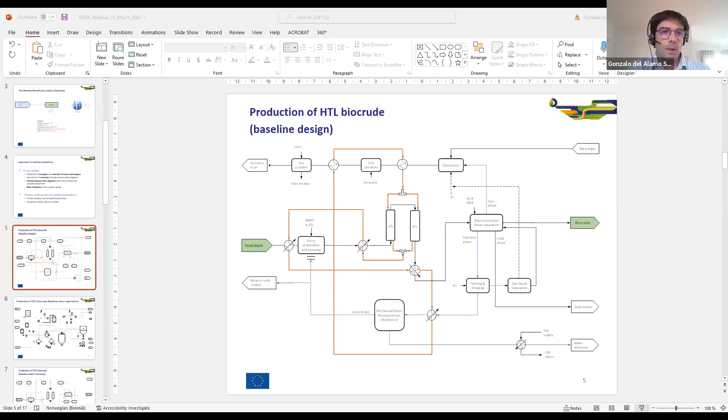Okay, thank you, Emma. So I will share my screen with my presentation. Share. Yeah. Okay, Emma, can you raise your hand? Perfect. You can see everything. Great. Yeah, good. Go for it.

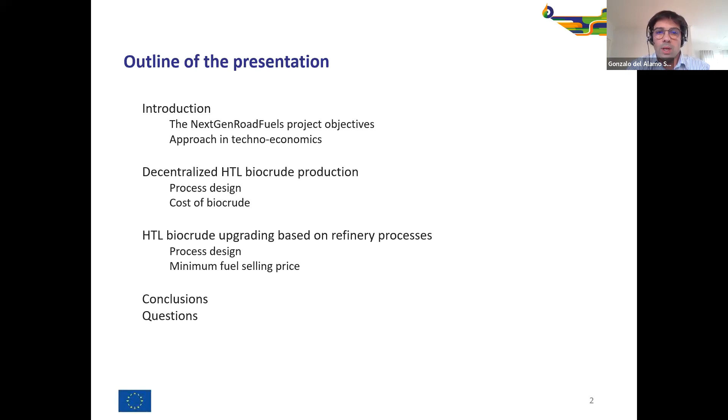Here I will use much time to look at the process design, and also I will present the main results for the cost of the biocrude. And then there will be another main section where we will look at the upgrading of the HTL biocrude based on refinery processes. Again, we will look at the process design, and also I will give the final results of the minimum fuel selling prices we have obtained. Then there will be some brief conclusions, and then I will give you the opportunity to ask some questions.

A few words about the NextGenRoadFuels project objectives. So basically, the project aims to produce marketable road fuels, in this case gasoline and diesel, from what we call aggregated urban waste. And aggregated urban waste are different main fractions of waste that one can find in cities. In this case, the three main fractions we have considered are sewage sludge, bio-waste, or the organic fraction of municipal solid waste, and then waste wood.

And then looking at the overall process or the overall value chains, there are two main aspects in the overall conversion. First, we consider the conversion of the feedstock to what we call a biocrude, which is an oil phase intermediate product. And this is done in a decentralized plant where the main technology is hydrothermal liquefaction at supercritical water conditions. Part of the HTL plant includes the separation of both nitrogen and phosphorus from the feedstock. And then the biocrude produced from the decentralized HTL plant is upgraded to final marketable biofuels at a centralized refinery, based on conventional refinery processes.

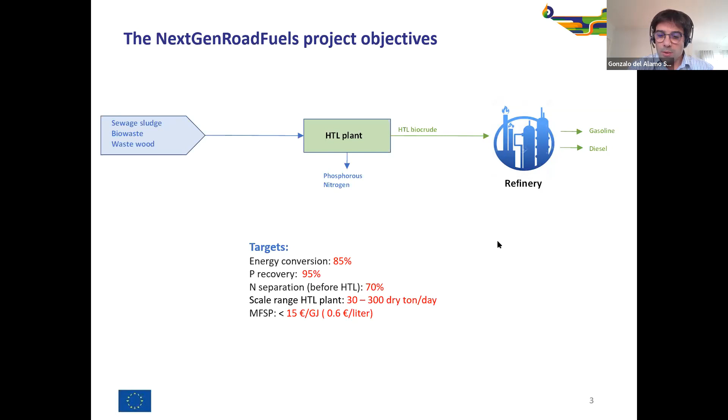Okay, approach in techno-economics. So this is the approach we have been using in this project. And also this is the typical approach that we at SINTEF Energy Research follow to do techno-economic analysis. Here, what is important in techno-economic analysis is to actually achieve some realistic results for the final cost of the biofuels produced from the overall technological route that we propose.

And then this includes some important aspects to consider. The first one is on the process design. So it's really important to develop a quite realistic and detailed process design that also includes technologies in the integrated process that are feasible. So then it's important to really spend time defining the overall strategies for the process design and also do a good selection of the technologies that will be involved in the overall process.

Then once we have these strategies and main technologies defined, we can describe different scenarios through what we call process block diagrams that show the integration of the main different processes involved in the overall conversion. And then once we have that, we look much more into the details of the process design, and we identify individual main process equipment, but also auxiliary equipment, and we develop what we call detailed process flow diagrams, which are engineering flow sheets.

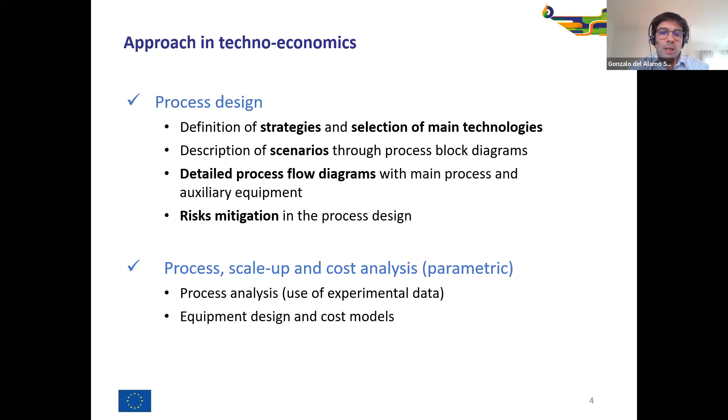Then on the analysis itself, the approach that we follow at SINTEF is to combine the process, the equipment scale-up, and the cost analysis through combined parametric models. And this is the approach we have been using in this project.

Okay, so then I will talk about the production of HTL biocrude. This is a decentralized production of HTL biocrude, and for this biocrude production, we have considered 4 different scenarios. In this slide, I am presenting what we call the baseline process design. The baseline process design is the simplest design that you can have to be able to produce biocrude from the feedstock. This process design is mainly based on the existing commercial technology of Steeper Energy, which is an industrial partner in this project. But this proprietary process design has been modified in the project to be able to process urban waste.

And then looking at this overall baseline process design, there are main aspects that I will highlight. First, there is a heating of the feedstock before mixing with the catalyst in what we call a slurry preparation. This is an important aspect in the design because we need to heat up the slurry before being pumped, mainly to reduce the viscosity. Then after the slurry preparation, there is another heating to be able to reach the supercritical water conditions for the HTL process. And then there is the conversion of the feedstock in the HTL reactor, basically to produce the biocrude.

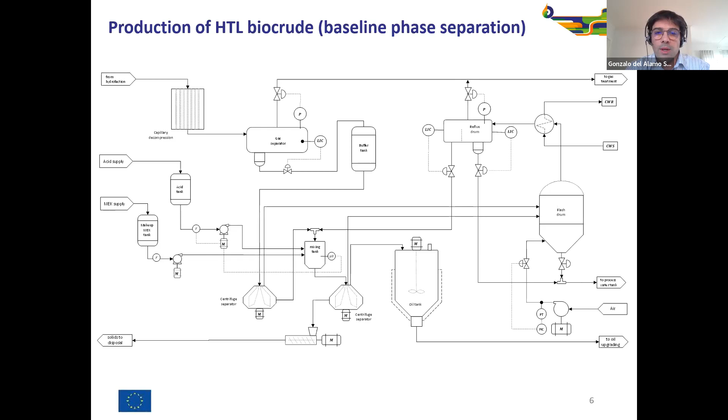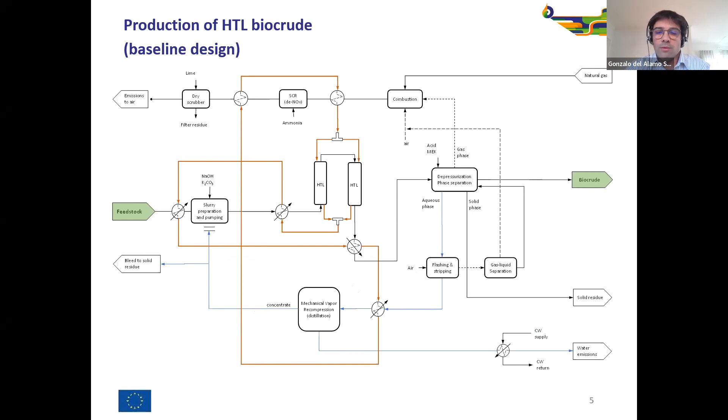Sorry, I forgot to say that in this simplest baseline process design, we have not included any separation of nitrogen from the feedstock, and we have not included any recovery of phosphorus. This is a second scenario where we include the recovery of phosphorus in the baseline process design. The main strategy for separating phosphorus comes from the fact, and this has been measured experimentally, that most of the phosphorus contained in the feedstock ends up in the solid phase after the phase separation. We are talking about around 95%.

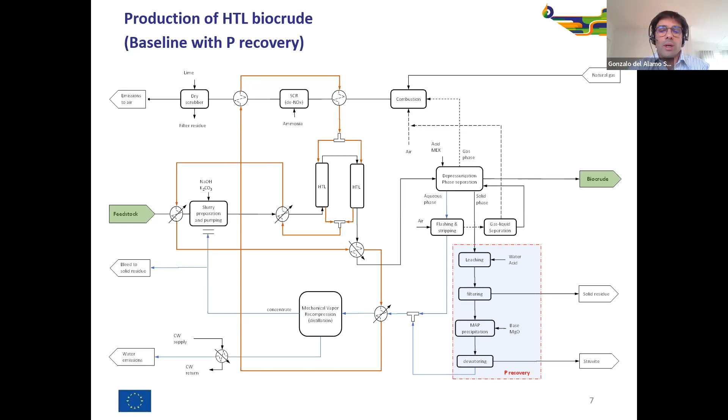Then the best strategy to recover phosphorus is to separate it from the solid phase through leaching of the phosphorus at acid conditions, and then precipitate the phosphorus as struvite using ammonium present in the aqueous phase, and also magnesium. Then after the precipitation of the struvite, there is a dewatering system where the struvite is dewatered and separated, and the remaining aqueous phase is taken back to the process water treatment.

And there is a third scenario where we introduce both separation of nitrogen from the feedstock and phosphorus recovery. This is achieved before the HTL process. In this scenario, what we include is a thermal hydrolysis of the feedstock at around 120 degrees Celsius. At these conditions, we can achieve a high solubility of the nitrogen and also high solubility of phosphorus and metals.

The nitrogen that is dissolved in the thermal hydrolysis is mainly in the form of ammonium ions, and the separation of the ammonium can be achieved after the thermal hydrolysis through air stripping. The air with the separated ammonia is taken back and mixed with the combustion air. Then after separation of the ammonia, there is a filtering where the retentate, the solid fraction, is taken to the HTL process. And the liquid phase contains solubilized phosphorus, which again can be separated in the form of struvite through precipitation.

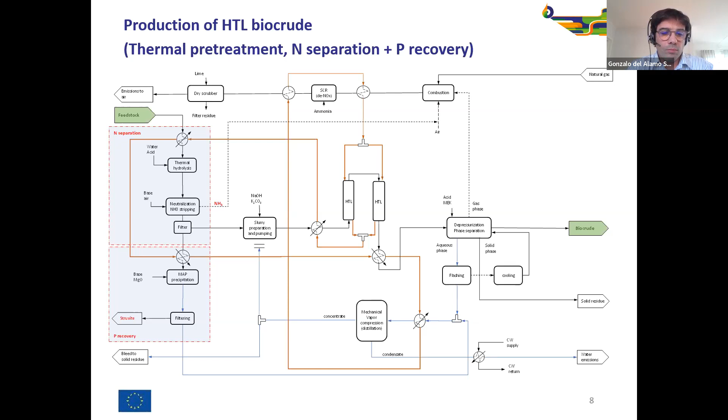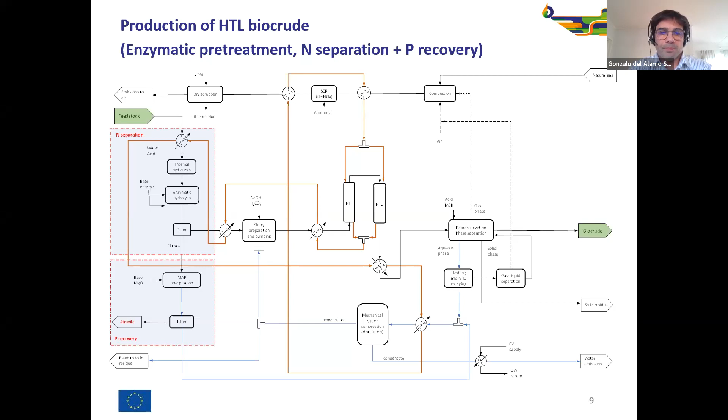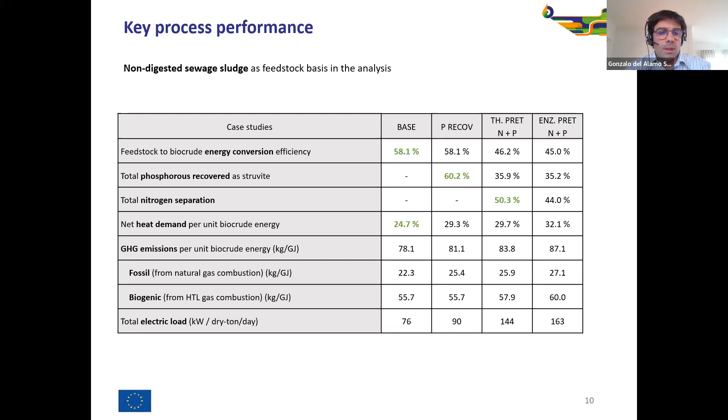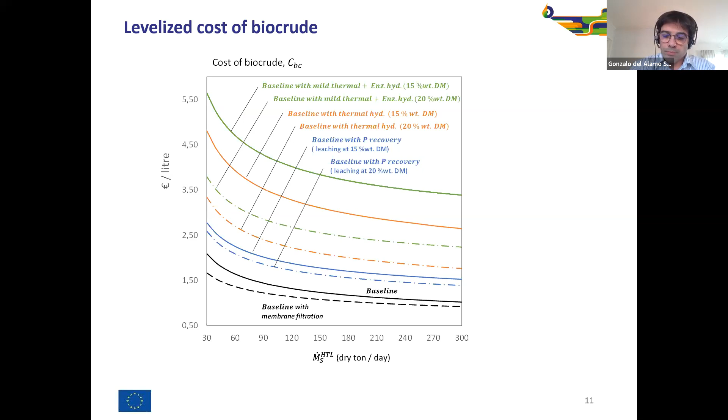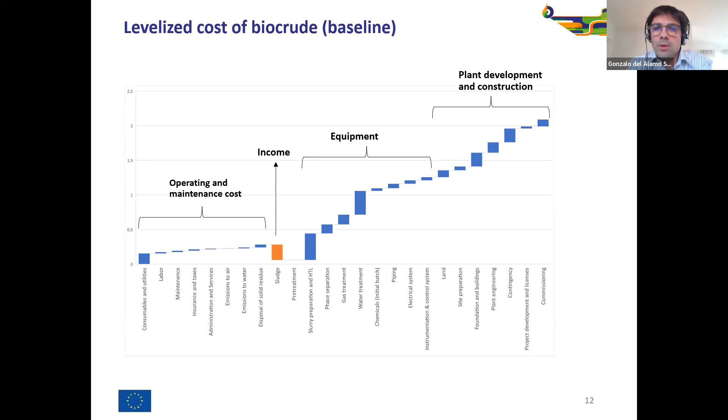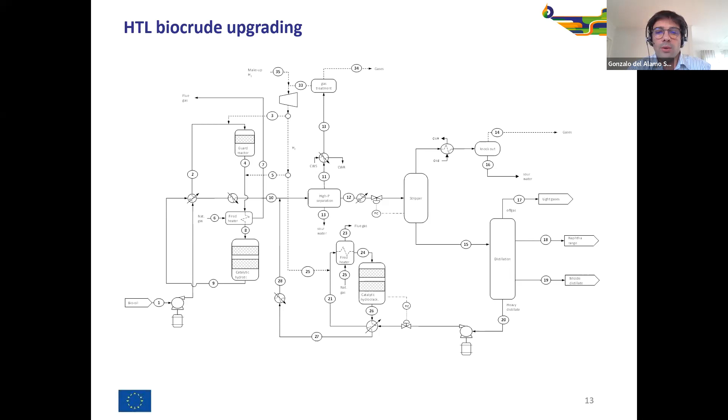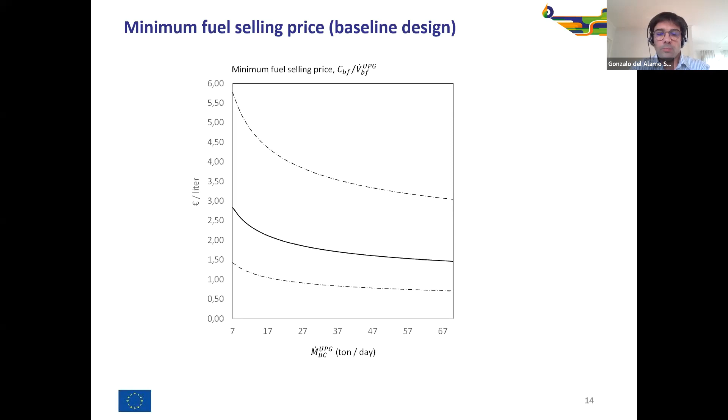So then some main conclusions to this presentation, and these are the key results from the analysis. Through the process that I have presented, we can achieve a conversion of the feedstock to biofuels of around 48%, with a minimum fuel selling price between 0.9 and 3.4 euros per liter. And there is an associated greenhouse gas emission, only fossil-based, of around 37 kilograms CO2 equivalent per gigajoule of biofuels produced.

There is some future work that we still aim to do in this project. One is more analysis considering different blends of urban waste, and also there is a potential of reducing the capital cost of the HTL production plant by introducing membrane filtration technology in the water treatment of the HTL aqueous phase. This is also an analysis that we would like to do.

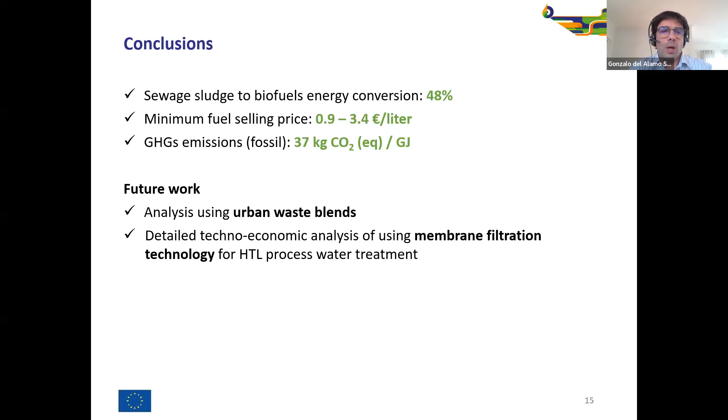That was really interesting, and hopefully a positive aspect for today when, like I said before, we see how expensive our petrol is now, at least we can think positively for the future that we'll have an alternative.

Okay, great. And so we've had some questions here. We'll start with Sinan from Bitlis Eren University. We've got three questions here. The first one says that it's made from waste and its approximate cost was 0.6 euros per litre. Have you had a chance to calculate the initial investment cost and operating cost of biodiesel production from waste oil per litre of biodiesel produced?